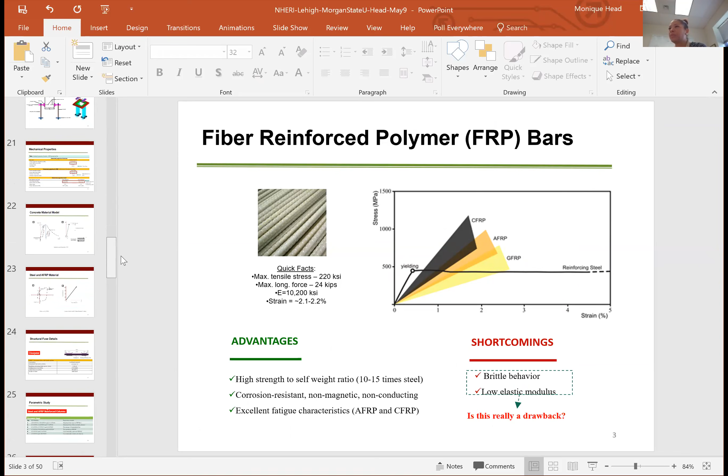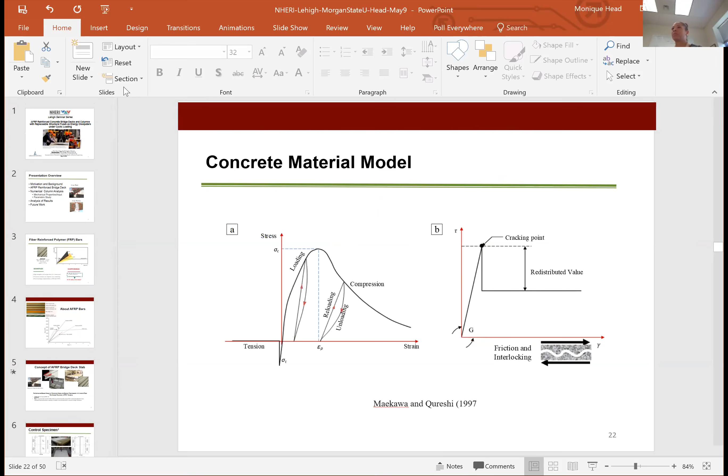Hello? Hello. Hi Thomas, Mike, it's Monique. How are you? Good. Looks like you got everything going, you already got your little screen up. So perfect, okay, got things under control. All right, thanks. Sure.

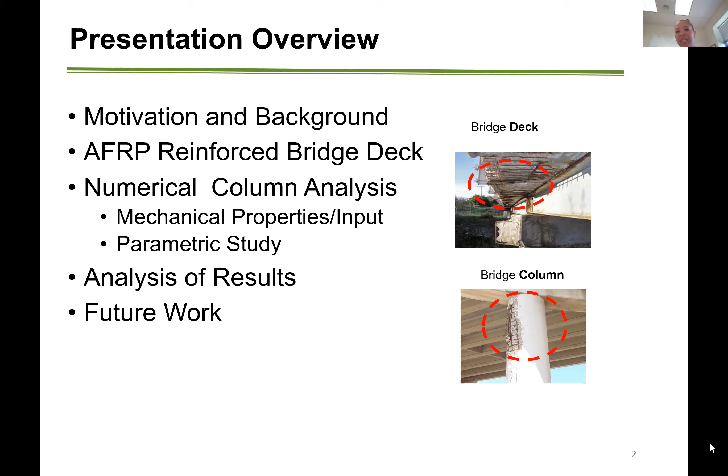So as a little bit of background to fiber reinforced polymer bars, in general composite materials are nothing new, but are gaining more interest, particularly in civil engineering applications. You've probably heard a lot in terms of retrofitting structures with these, either FRP wraps, or things of that nature. But for this study, I'm looking at using them as internal reinforcement to replace conventional steel rebar.

Just to give you an idea of what we're looking at in terms of a stress strain curve, you would see your traditional reinforcing steel has a clear yield point and is quite ductile for larger than 4 or 5% strains. Contrary to steel, the FRP bars are brittle, they're linear elastic, and we know that that could be a challenge or maybe a shortcoming. However, they have strains on the order of 1 to maybe 2.5%.

So we have the carbon, the aramid, which I'm using in this study, again being like a Kevlar type, kind of a middle grade level compared to the others, and the glass. We have seen that AASHTO has had some documents and specifications for glass fiber reinforced polymers for pedestrian bridges. So things are moving along, but in terms of an industry standard of acceptance, it's still developing.

I'll be focusing on how we're engineering the system using these seemingly linearly elastic bars, but designing them in the range for which we want them to remain elastic, and then address the damage in other areas using replaceable fuses for the columns.

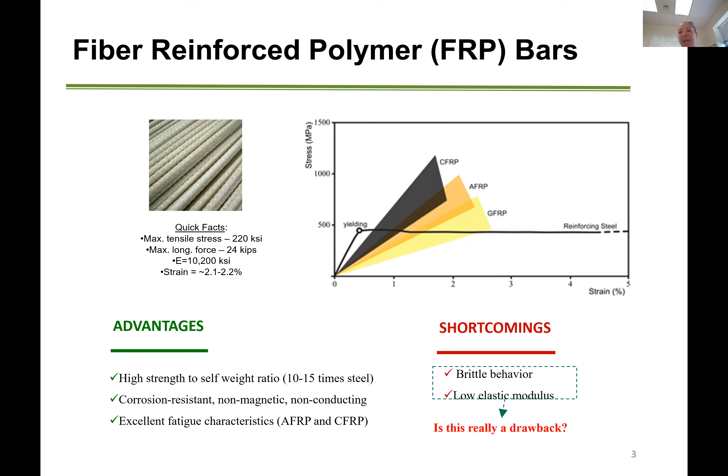Diving a bit deeper into AFRP bars, there are several types commercially available. The AFRP is what I focused on. It's a little less stiff than CFRP carbon, but stiffer than glass. Technora is a type fabricated out of Japan, with a lower stiffness. We used the AFRP type and compared it to steel.

These bars come in different types: round bar, deformed bar, larger round bars, larger deformed bars, even flat plates, and Technora actually produces a pre-stressing strand. But for this study, I focused on the AFRP bars that were round.

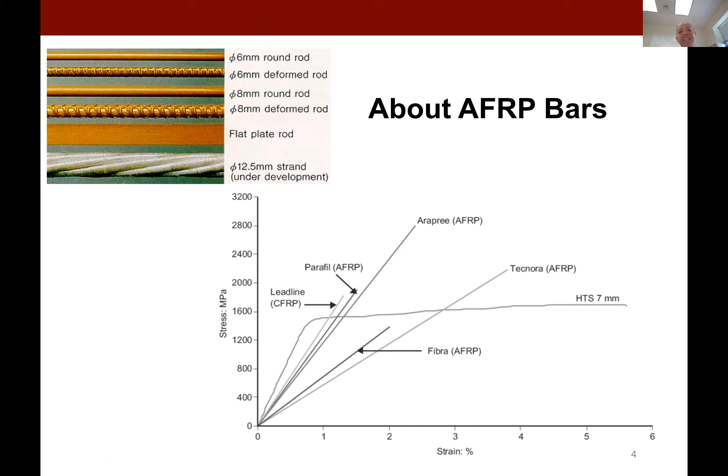So what led us to this step? I was involved in a TxDOT project, and I'll use the flip side of the test specimen for the conventional bridge deck to compare my studies with the composite.

In Texas, they were looking at having a monolithic bridge deck overhang with the exterior deck panel. The idea was, can we make it one panel to avoid constructing this 3-foot overhang where worker safety was an issue?

We also see in past cases deterioration from corrosion, particularly of bridges in marine environments. So my thought was, why don't we look at these bridge deck panels but using composite bars instead?

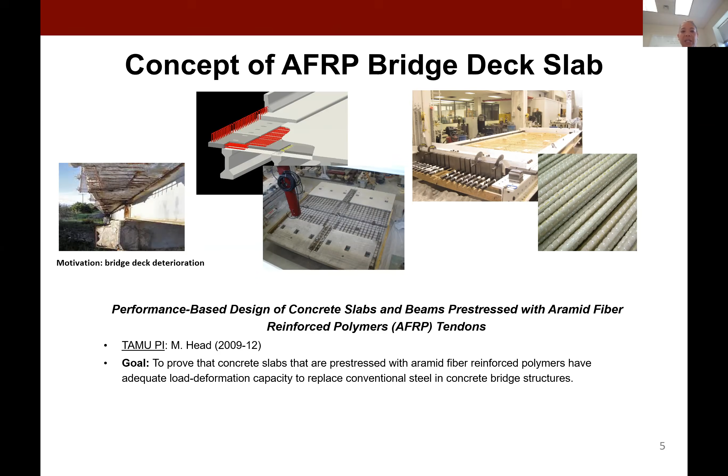That's what led me here, and I'll give a summary of the success and mechanics of the bridge deck reinforced with composite bars. In the TxDOT project, they had full depth pre-stressed panels totally of steel, but on the other side we had our control specimen, which I'll compare to my composite case.

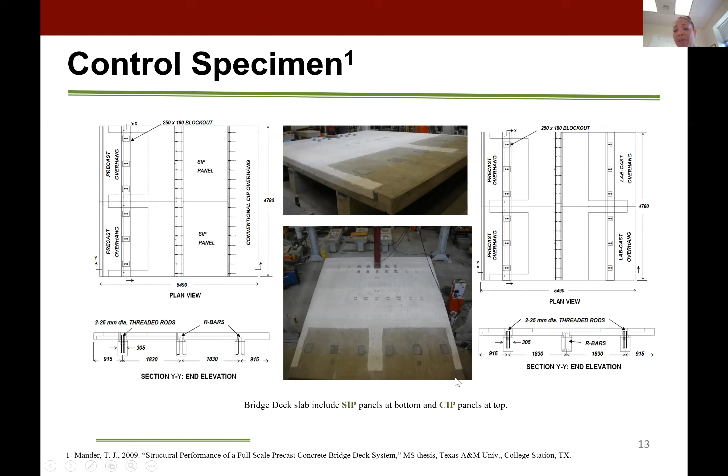General specifications: we had 2 side-by-side panels, each 8 feet by 9 feet long, globally 18 by 19 feet. For this bridge deck, we had stay-in-place panels of 4 inches, and a cast-in-place panel of about 4 inches with a closure pour throughout.

Moving on to what the bridge deck looked like, we used that side for our conventional reinforced concrete bridge deck to compare the results and see how well this AFRP bridge deck stacks up.

Using similar dimensions of 18 feet by 19 feet, we designed the system with concentric pre-stressing of the AFRPs throughout the deck, perpendicular to the traffic. We had 3 longitudinal beams, and one closure pour for the seam, for which we had AFRP bars bent to transfer shear between the decks.

We wanted to make sure we had continuity of the shear transfer across the deck. We had the same shear pockets as in the TxDOT case, 10-inch by 7-inch pockets where a high strength grout was poured in for these post-install anchorages to ensure composite action between the deck and the beams.

We also did an equivalent force calculation to figure out how much AFRP we needed. We had AFRP bars on the top and bottom layers, non-pre-stressed, at about 150 millimeters center to center on top and bottom.

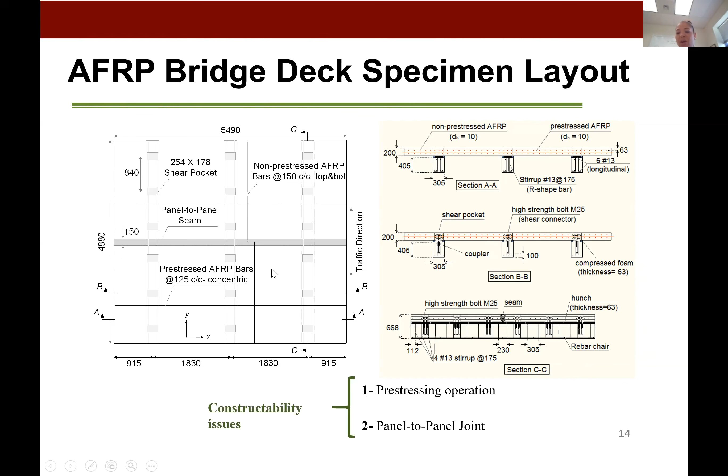One of the challenges we saw, even from previous examples, was constructability - what would the pre-stressing operation be, and making sure that between the panels we had enough continuous transfer.

So we constructed the bridge deck panels side by side with the AFRP bars shown in yellow. For pre-stressing, we had a dead end and a live end with a strong back on the dead end, and we were pulling with a single hole jack per strand.

We would pull on the bar with a hydraulic ram, then cast in a high strength grout into this pipe, which took about 3 hours to get a full set. So there was a lot of time and a continuous operation there.

Before transitioning, they did a full scale test with a lap splice using these bars and were able to use conventional pre-stressing equipment. So it can be done even in the field, although we just used a single hole jack for pulling on the AFRP bars.

Once we pulled on them and poured the grout into the pipe, we locked in the stresses to get the achievable pre-stressing tension we wanted, and then cut the strands. That took about 3 hours per strand for all 20 of those concentrically pre-stressed strands.

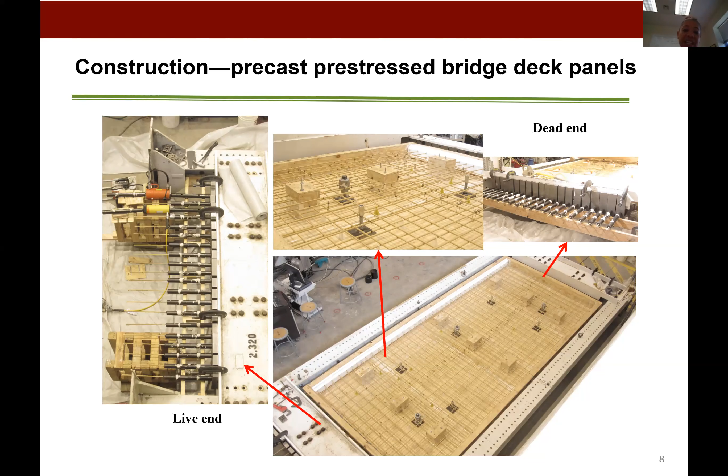Then of course the top and bottom grids were laid with non-pre-stressed bars. That led to our testing plan.

We had essentially 7 load cases following the AASHTO wheel load, where we looked at the trailing wheel loads for the interior span for load case 1. Load case 2 looked at the wheel load pad sitting right on the seam on the edge, right on the overhang with a single point load.

This was to really look at what an equivalent moment could look like if you had some type of impact on the barrier, and then converting that into an equivalent moment and force that could be felt there.

We also loaded on the edges as well as on the interior side by side for our wheel loads. Then again on the overhang, trailing wheel loads on the overhang, then going back to the corner, and interior wheel load 7 of a single load.

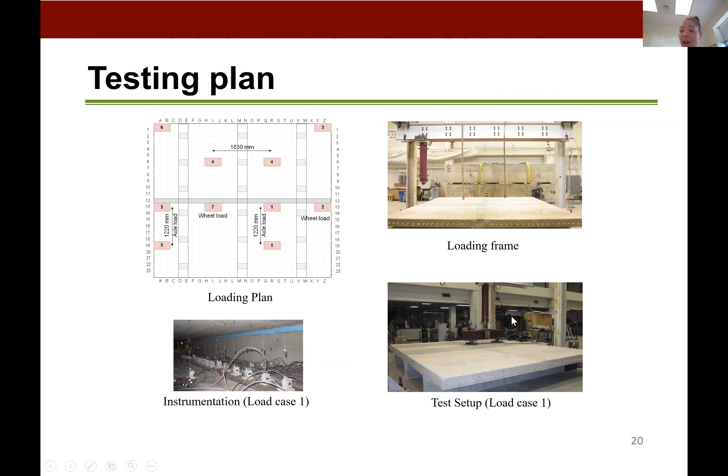So we had a lot of instrumentation, as you can imagine. We had one single ram applying the load through a spreader beam so we could mimic our wheel load cases. Moving on, we tested the bridge deck and got results that were very encouraging.

We saw this nice fan behavior. While the bars don't yield, we came up with a modified kind of yield line theory, and we got nice continuity just from mapping the cracks across the seam or joint there, which is very assuring. We were able to achieve some nice load deflection curves.

This is both when we had it on load case 5, loading on the overhang, as well as on the interior. We were able to achieve or exceed the AASHTO maximum factored load and service load.

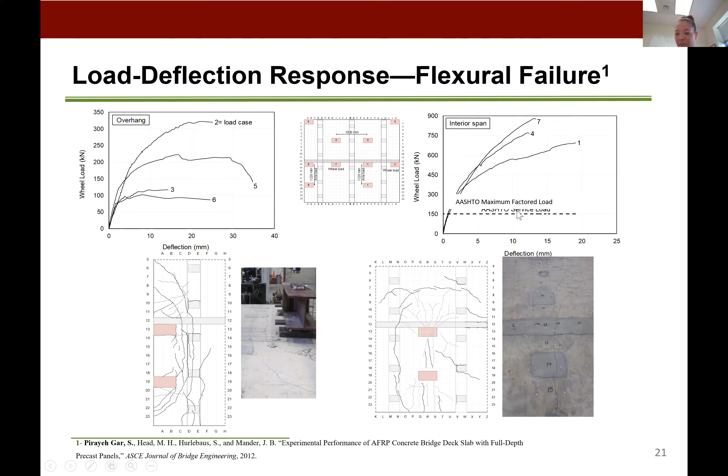So specifically, if we zoomed in on load case 1 on the interior span, what did we learn?

We basically learned that, as hypothesized, the AFRP specimen compared to the dashed line control specimen from the previous TxDOT project of the reinforced concrete bridge deck. We saw that we were able to achieve very high loads and also get similar deflections, and moreover we were able to achieve and exceed the AASHTO maximum factored load.

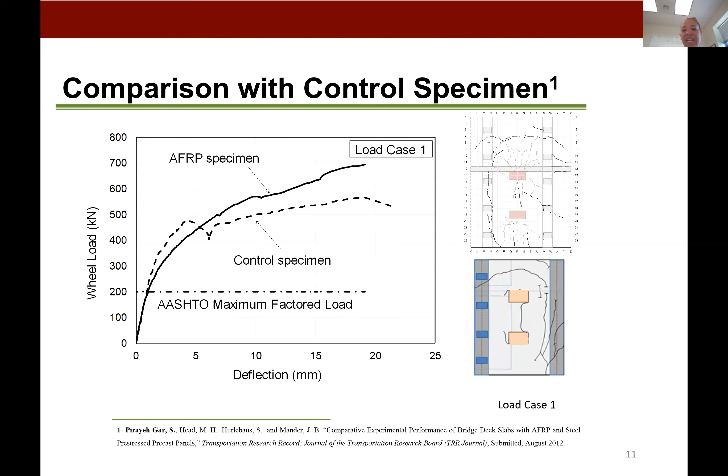This led us to also see how, naturally given the lower modulus, the system was still quite stiff but yet deformable. It was something we wanted to take advantage of and move into seeing how it can even expand to columns.

So the whole idea was, is it even possible to design a system that, as we look at in terms of displacement-based design conceptually, has the system remain elastic? Then have those elements that we want to yield, and have energy dissipators on the outside of these columns to dissipate the energy, while the internal system of bars remains linear elastic.

As we've seen from previous earthquakes and looking at column damage, bridge columns are the most seismically susceptible typically during an earthquake, since they provide the load resistant capacity of bridge structural systems. We know that confinement is also a major challenge.

So taking into account many different factors, we were trying to come up with a design of these columns with these AFRP bars that perhaps for low to moderate seismic zones could be appropriate.

We also recall that research efforts in the past have started to look at innovative materials, particularly their detailing and design. That's what led to this research looking at column damage tolerance, and moreover looking at post-earthquake serviceability to reduce eventual cost and repair.

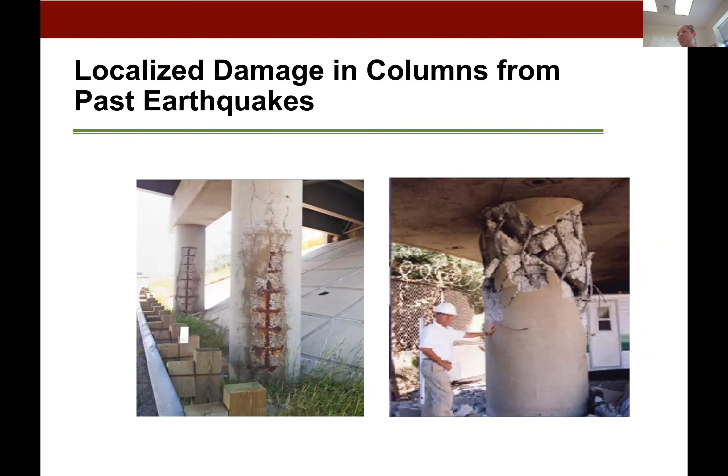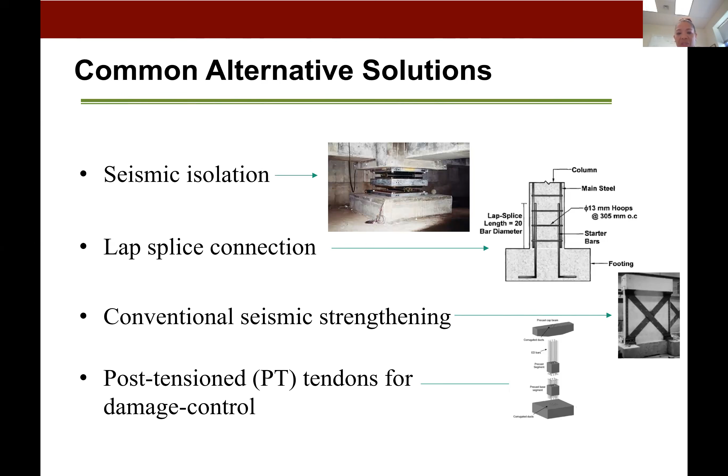We're probably familiar that, if we weren't looking at innovative materials, some alternative solutions to refocus the damage, particularly in bridge columns, would be seismic isolation, various lap splice connections, conventional strengthening using bracing systems, or even post-tension tendons for damage control.

Moving toward some of the studies that supported background information for this design of AFRP columns, we looked at research with post-tension column-base connections, like Liu et al. in 2008, where they had energy dissipating plate connections. The idea was to ensure uniform distribution of the tendon strains, which significantly delays yielding of the tendons, and to eliminate stress transfer to the concrete as the strains elongate over lateral loading.

In this system, they had post-tensioning high strength bars, buckling restrained steel plates, reinforcing plates, keeper plates, and shim plates. The idea for this study was a finite element analysis to achieve a performance-based design approach and validate it numerically with their FE model.

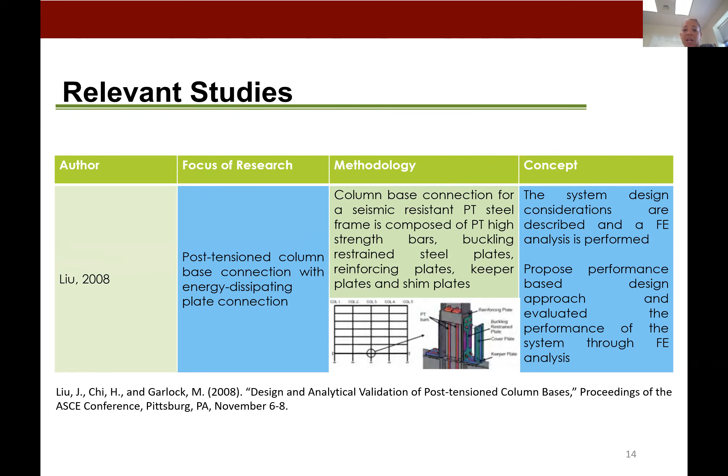We also studied research done by Kurama et al., who used the idea of coupled concrete walls with steel beams and unbonded post-tensioning. They used post-tension hybrid coupled walls with flange cover plates to delay the yielding of the beams, and seat angles at the top and bottom to provide energy dissipation.

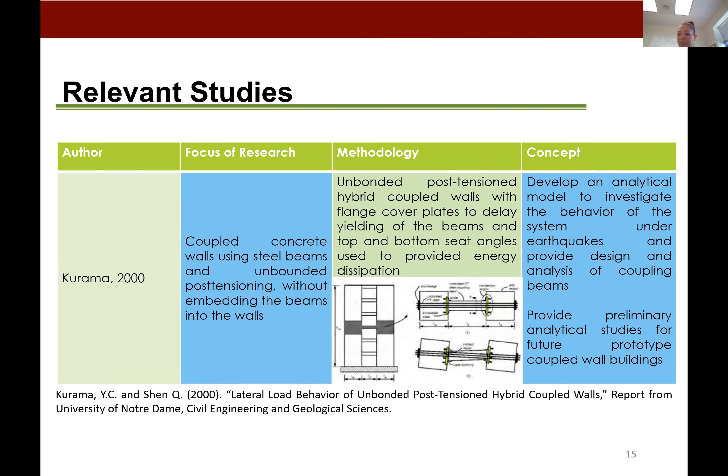We also started looking at basic reinforced column analysis in OpenSees with a graduate student, who has since finished here at Morgan, using an OpenSees model to compare the AFRP bars to conventional steel reinforced columns.

We found we got higher base shear—this is shear versus deformation from our results. Also, in terms of drift, we got significantly lower drifts in the AFRP bars compared to the steel, which obviously achieved a lot higher base shear.

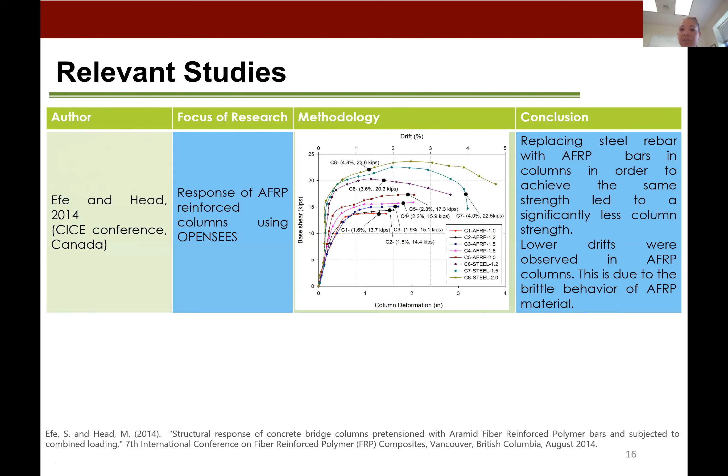With that, we realized we wanted to look a little deeper to understand and see if we could design a system for which we can achieve a reasonable design. So we extended this study to improve the damage performance of these reinforced columns by trying to prevent any premature rupture of the FRP bars.

ACI 440 notes that AFRP bars, or FRP bars, are not to serve as compression members. With that in mind, we are limiting the FRP bars as compression members but allowing them to behave in a manner and range for which they do well as elastic elements, able to respond elastically and ensure stress transfer to sacrificial members. This is where we decided to have mild steel dissipators on the outside of the column system, allowing the system to rock as well as dissipate energy, focusing the damage in these secondary, replaceable elements.

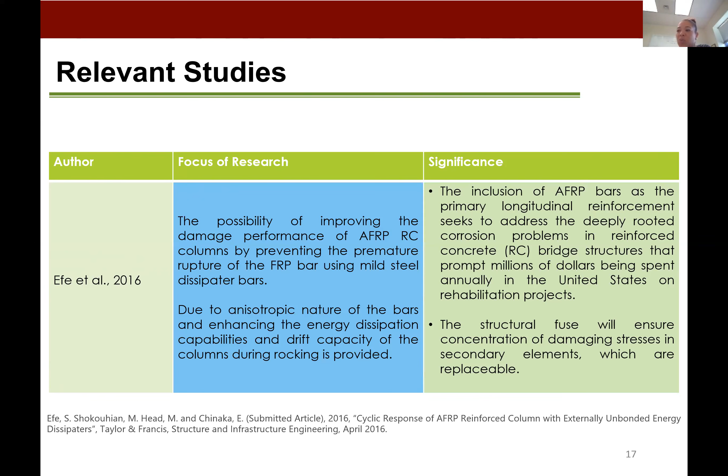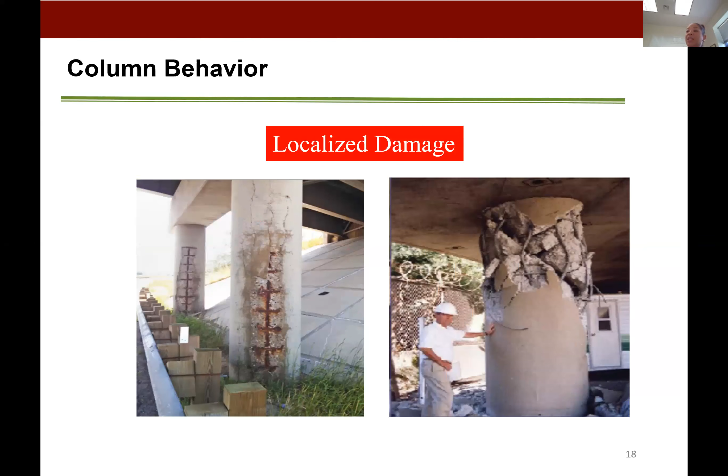I'll also talk about some of the results. Looking at where we've seen damage before, we're trying to use AFRP bars internally coupled with the energy dissipators to see how the system performs. The whole concept of replaceability of the fuses was to evaluate the drift of this rocking column with internally reinforced columns using AFRP bars.

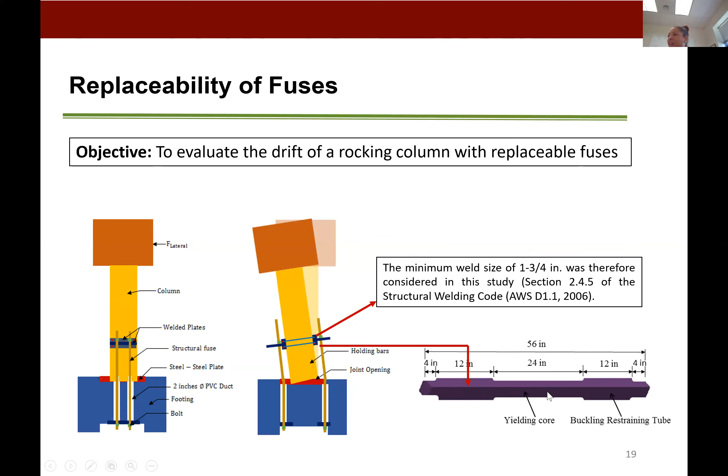If we look a little deeper, we have quite a bit of steel, four bars on the outer perimeter of the column, essentially a buckling restrained tube with an inner yielding core of about 1/2 inch and an outer core of about 1 inch.

Looking a bit closer at the details, which we are still refining - this is the first pass of the study looking at the connection interface where we have the rocking AFRP reinforced columns. We have a footing with a square column and a head block used to attach the actuators. The main objective for the rocking connection is to look at the stability of the column under axial load as well as bending, and any possibility of failure along the cross section above the column-foundation interface.

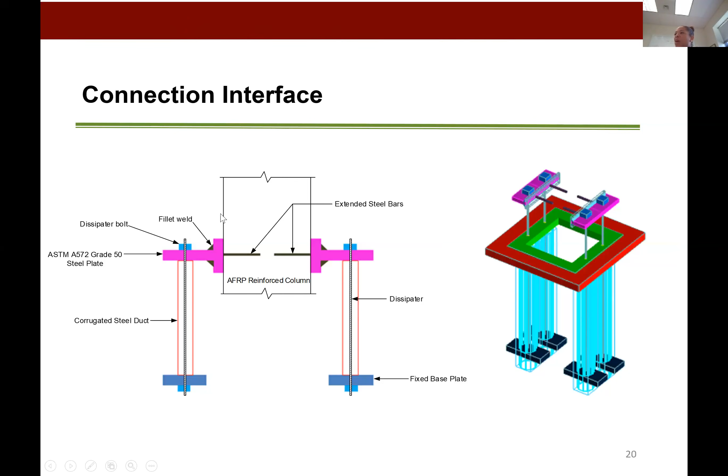What we see here: we have extended steel bars within the concrete column, fillet welds around the steel plates that are then attached to a core, connected to the actual energy dissipators, which are within a corrugated duct that runs through the foundation of the system.

Looking at our mechanical properties, we're using about 4,700 strength concrete, so no high strength concrete, with typical elastic modulus for the concrete as shown, just using basic properties of the concrete.

We pulled the manufacturer's data to resemble and mimic the AFRP bars, with 10,000 KSI for the modulus of elasticity, and looking at ultimate strains of about 0.02, so about 2% strain. For the mechanical properties of the steel, we're looking at grade 60, with yield stress and fracture stress for the plates and the reinforcing steel.

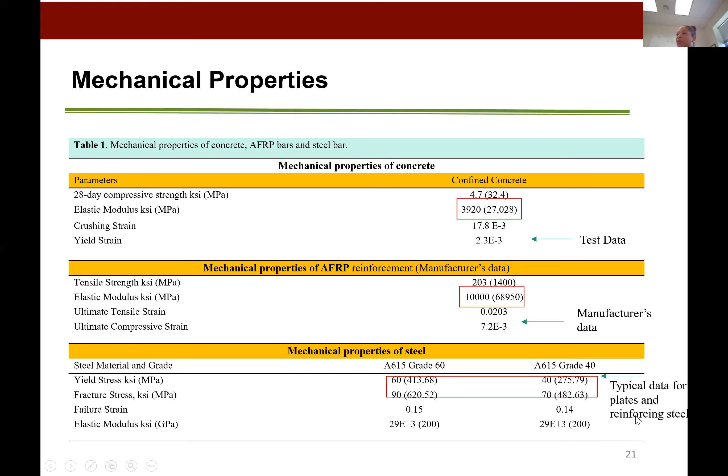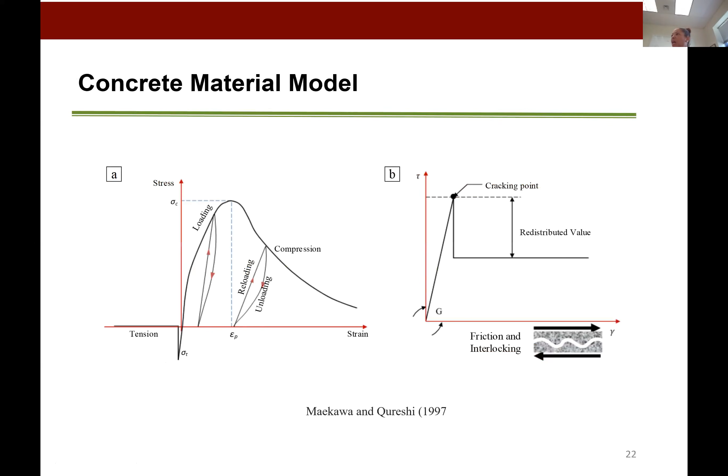For the model, we adopted the Maekawa and Qureshi concrete model, which allowed us to model the nonlinearity of the concrete, as well as our traditional steel nonlinear model for the reinforcing steel. For the AFRP bars, given that they're linear elastic, we used a linear elastic model based on manufacturer data to represent the bars.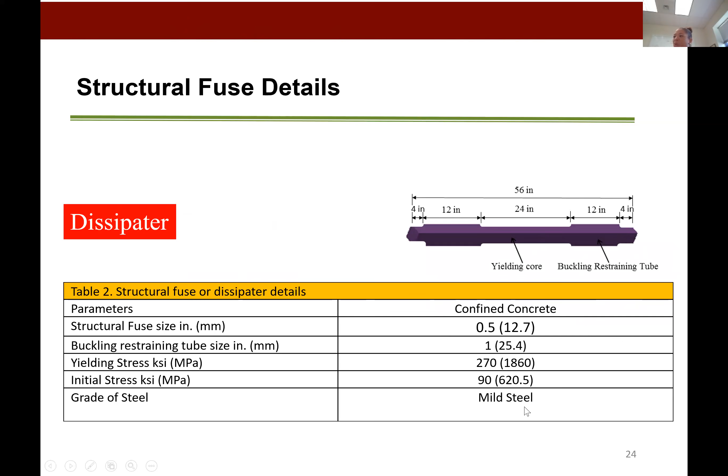So for the parametric study, comparing the steel and the AFRP, we had several models. I'll go through the nomenclature of how we selected these. We looked at models where the main design parameters were varying the size of the structural fuse, looking at its effect on the steel columns, also varying the percentage of the longitudinal bar ratio, and of course looking at confinement - the tie spacing of the FRP bars within the reinforced column.

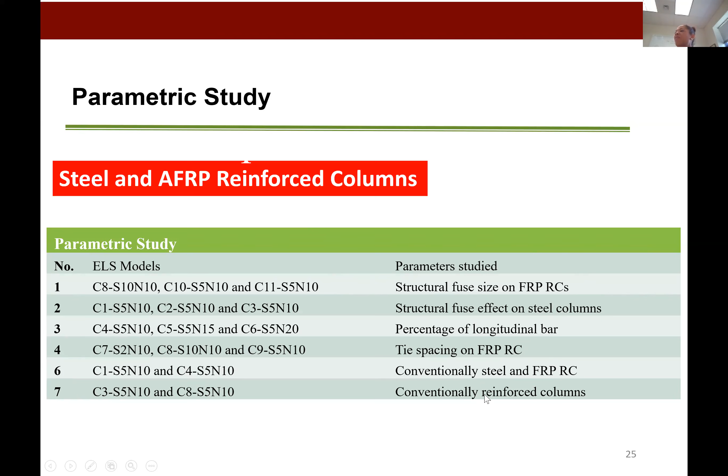The other cases, C1 and C4, are conventionally steel and FRP reinforced concrete, so we'll keep our eye on C4. The conventionally reinforced columns are C3 and C8.

Putting this all together, we have this numerical model with the square column as shown, the column reinforcing details with the energy dissipators - four of them attached to steel plates - where we're trying to focus the damage in this region. The idea is that we're just replacing the fuses.

Again, a lot of information on what we looked at, but let's focus our attention on these results, mainly on model specimens C4 and C5, where we varied the longitudinal reinforcement ratio at 1 and 1.5%, and a tie spacing of about 5 inches.

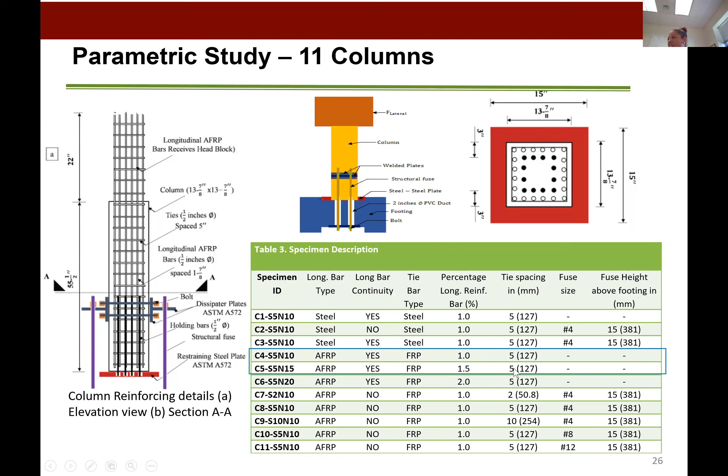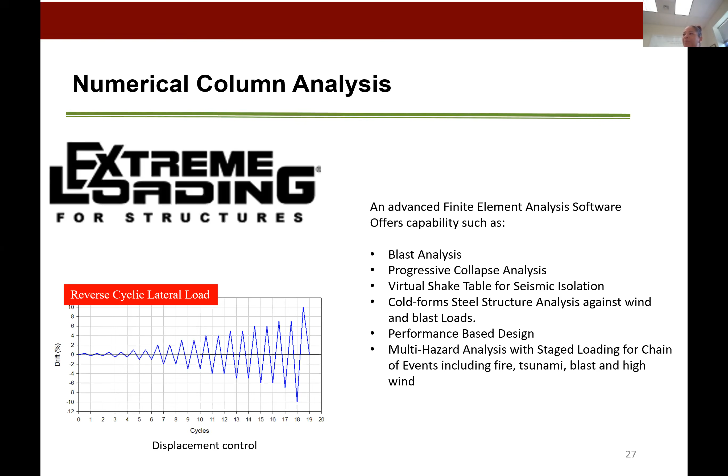For the numerical analysis, we had originally started with OpenSees, but ended up using a software called Extreme Loading for Structures, which is a finite element analysis software that enables blast, progressive collapse analysis, virtual shake table studies for seismic isolation, cold form structures, performance-based design, and even multi-hazard analysis.

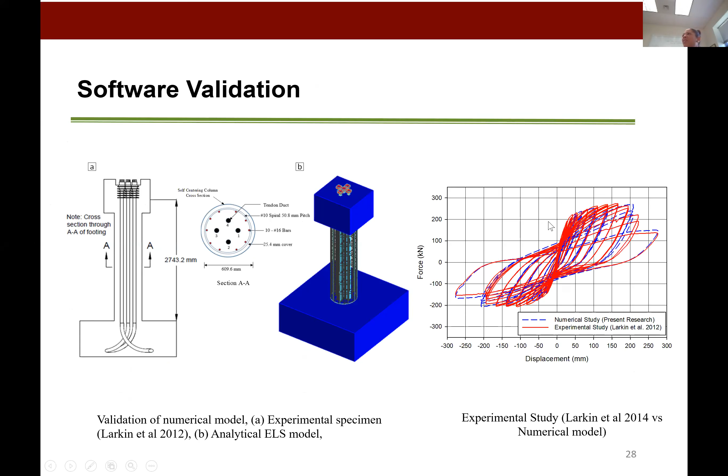We had to validate the performance of the software, so we compared our results by replicating a traditional circular column with tendon ducts, based on a study by Larkin in 2012. The blue shows our numerical study compared with Larkin's experimental studies, validating the mechanical and nonlinear behavior to confirm the model was doing what we wanted.

For the study, there are several factors we assessed in terms of global performance of the column, examining post-peak strength deformation and ductility of the column, but more so in terms of the AFRP bars, considering this deformability since there's no clear yield point, and how we navigate that.

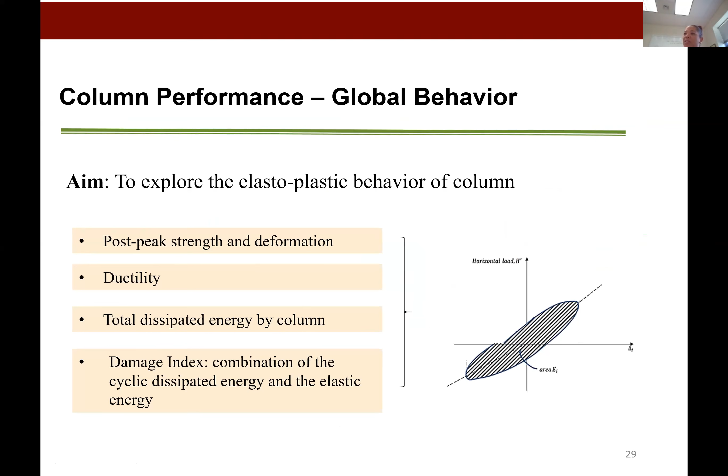We'll also look at the total dissipated energy of the column, and then this defined damage index, which is a combination of the cyclic dissipated energy as well as elastic energy.

If we move on to look at the local behavior, particularly of this system which consists of structural fuses embedded down in a duct into the foundation, we look at the failure modes we would see, be it weld failure at the plates interface, yielding of the structural fuse itself, or any fracture of the AFRP bars, which is not desirable but something we're looking out for in these models.

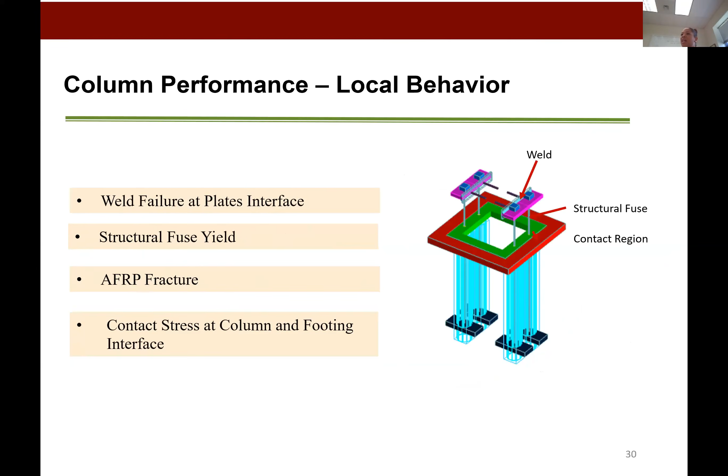We also look at the contact stress at the column and footing interface as the column rocks.

For the inelastic column behavior, in terms of energy dissipation, we were able to come up with some ideal curve definitions as we tabulated what the results would be from the numerical results.

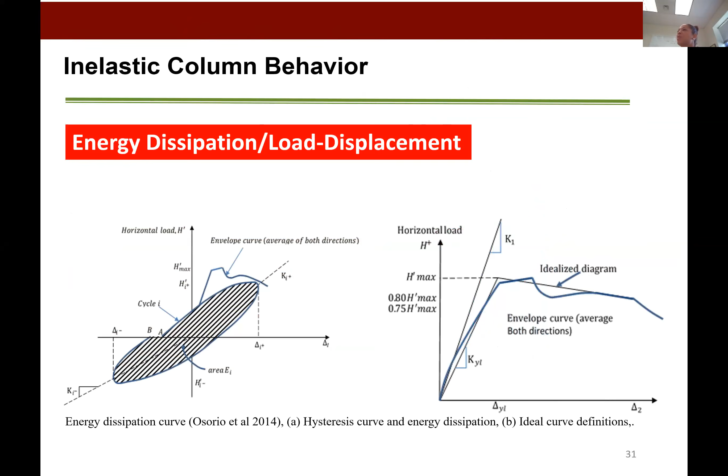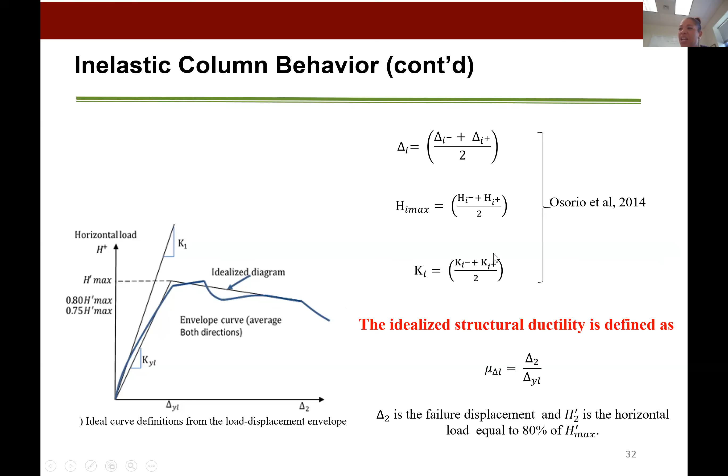For the idealized structural ductility, we define it using the failure displacement, where H2 prime is the horizontal load equal to 80% of H1, H prime max. Basically, we take the peak and come up with these idealized curves so we can compute how much energy is being dissipated in terms of the area under the curve.

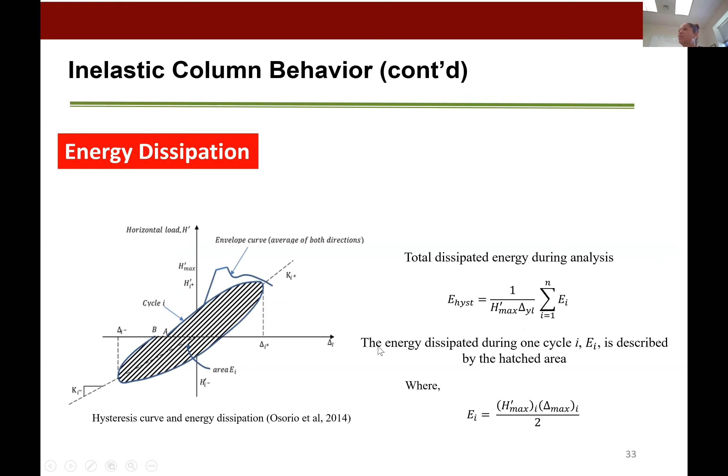We were also able to calculate, from basic structural dynamics as well as looking at various models recently produced by Osorio et al. 2014, the total dissipated energy.

For the damage index, which we define based on Osorio et al. 2014, it combines the cyclic dissipated energy as well as the elastic energy to come up with an index showing how much damage we're seeing in the column.

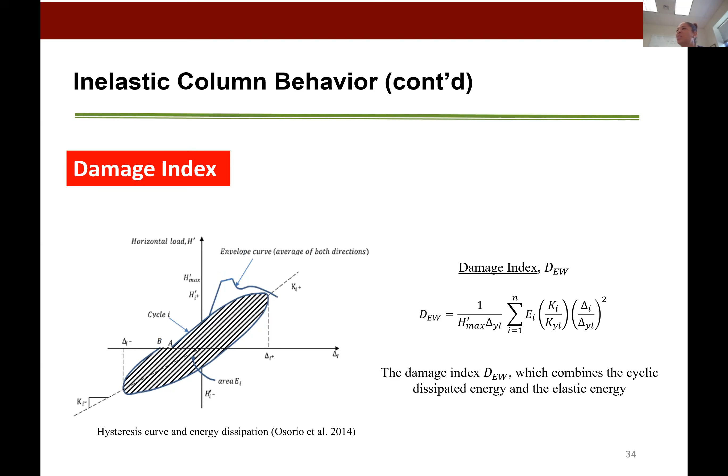Definitely a lot of results came from the parametric study. We can focus on columns 5, 6, 7, and also 8. I'd mentioned column 4 before, and as we evolved, varying the longitudinal reinforcement ratio and looking at various confinements, we were able to see that we got pretty good peak loads.

This is load versus displacement. As we shortened the tie spacing, we went down as far as 2 inches, dropping it from 5-inch spacing to about 2-inch spacing.

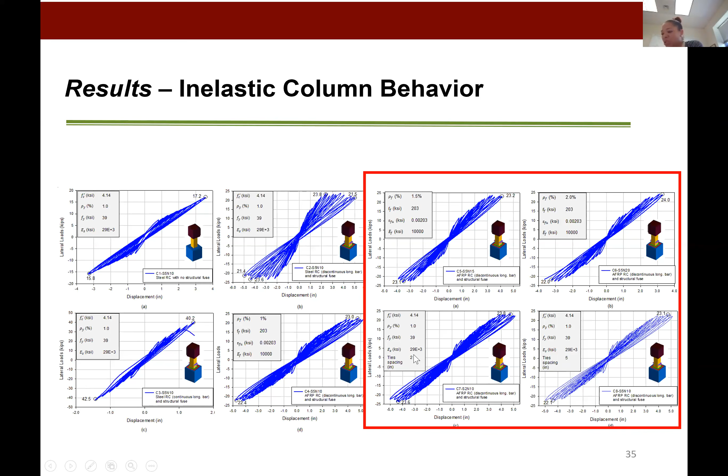In tabulating all the results, in terms of column drift, for the C4 column we were getting about 5.7 drift compared with C7 and C8 for the AFRP columns. We also looked in terms of ductility and energy dissipation.

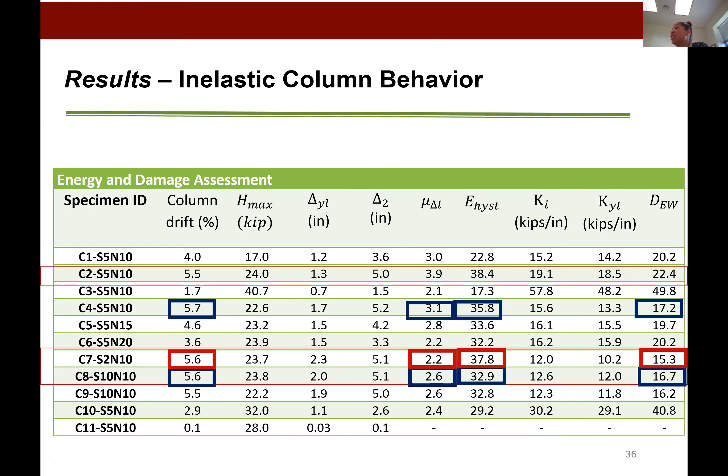We actually saw that we got a large amount of energy that was dissipated. But moreover, looking at the damage index number, we had a lower damage index, meaning having the system rock to dissipate energy was very advantageous, so we're not focusing as much damage within the column, but allowing the dissipators to yield and take on those stresses.

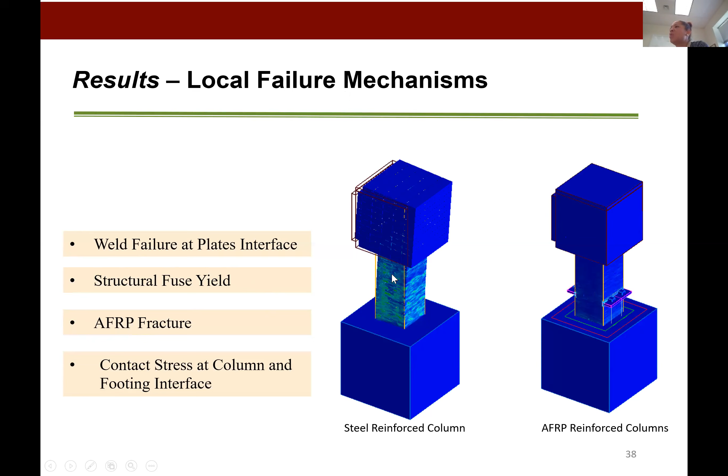In terms of the local failure mechanisms, as I mentioned before, we were able to see from the finite element model how much.